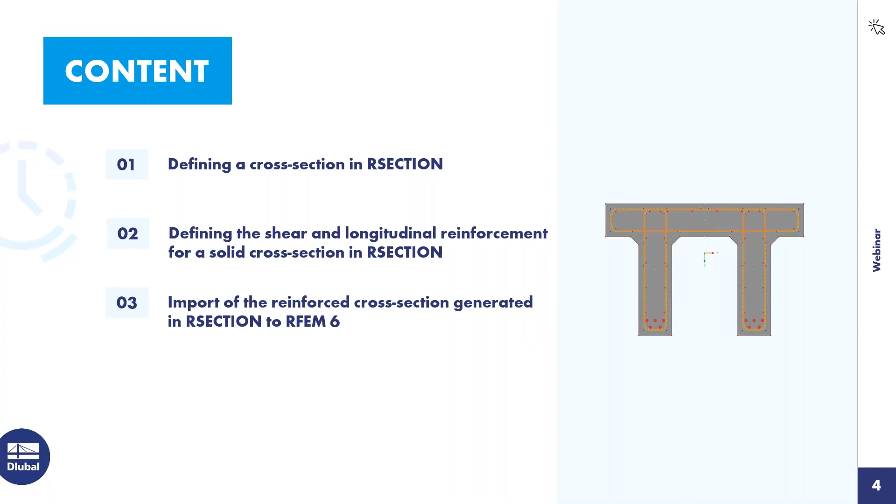Paul will do that. Then he will define the reinforcement in RSECTION, for the cross section that you see on the right side. Then Paul will import the section into RFEM 6, and then he will design the cross section in RFEM 6 with the help of the concrete design add-on.

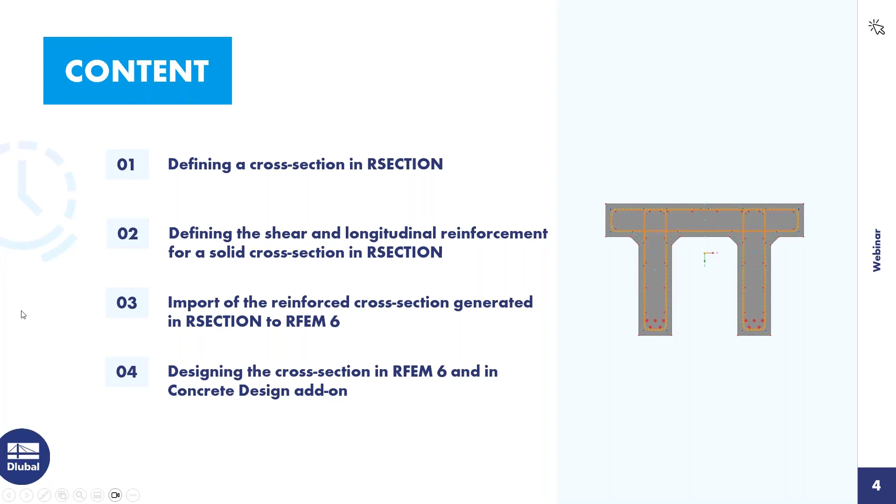Okay, then I hand over the screen to Paul. Paul, it's your turn. Okay, thanks Andreas for the introduction. And I can directly start with our standalone program, RSECTION.

And I will create directly a new model for our section. So I'm entering here a model name. Let's just name it maybe RSECTION and maybe 1, because I will show you multiple ways to define a section in this program.

Because I will show you multiple ways to define a section in this program, what's important now is if you would like to apply reinforcement on your section and do the concrete design, then you have to check on this option here, concrete reinforcement.

And as you see now here, there appeared a new tab, reinforcement settings. Inside this tab, you can define the value for the concrete covering. It is set by default to 30 millimeters. For our example today, I will leave it here with 30 millimeters. I just confirm it.

And then we get this view here. So we have our navigator, we have our tables here, and our graphical window. And now we can just use the options in RSECTION to create any type of massive section.

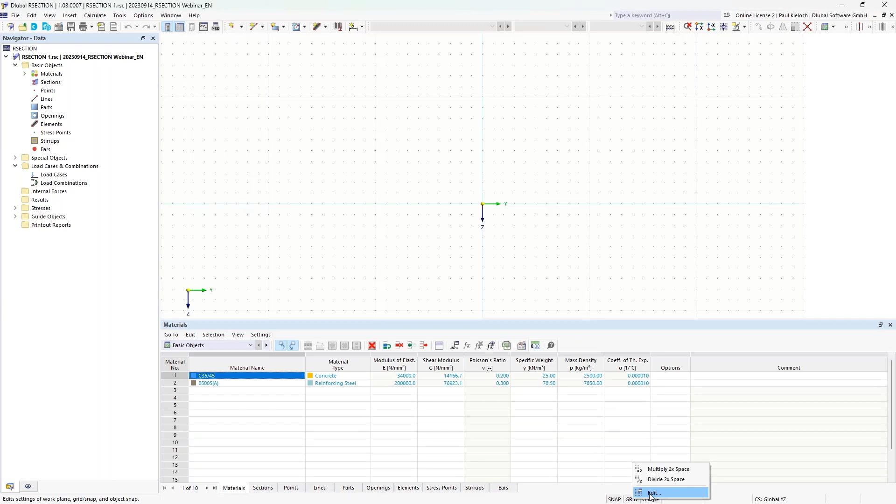So I will start here at first in the first example with creation of a section by using lines. Therefore I will at first create or modify the grid. So I'm opening the settings for the grid and I will change here the grid point distance to 10 centimeters.

So in this way, then I can start with graphical input of the cross section. But before I do that, I can just tell you something about the materials. In this case, the program has loaded 2 materials from my last file, so in this example it fits already perfectly. I need a concrete material for the section and a reinforcement material.

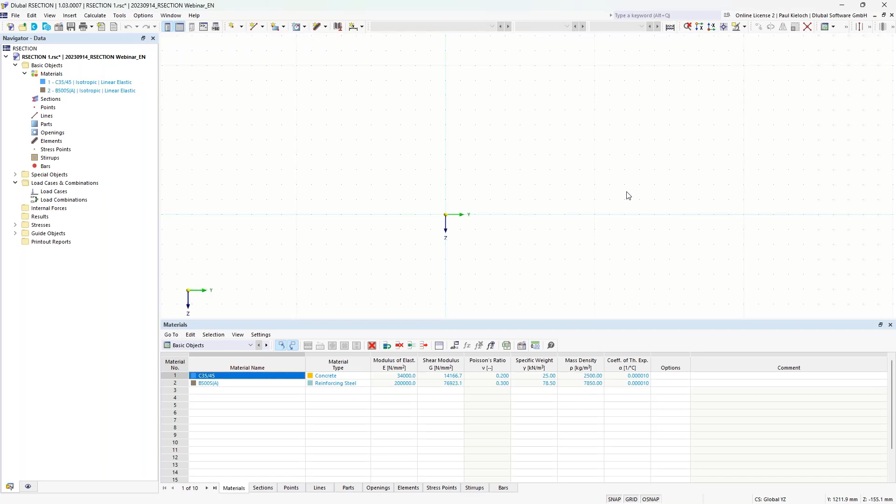If you do not find the proper material, then you can apply material or create a material in the same way you already know from RFEM 6.

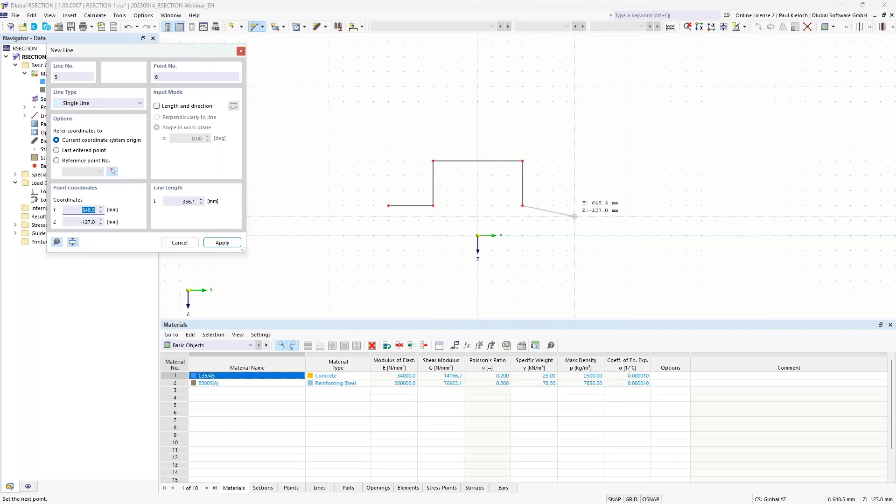As I said, in the first example I will just create here lines, boundary lines for a new section. For example, I can do it in this way: just clicking here into these grid points and create a random section. It could look like this.

And if these boundary lines were defined, then you can create here new parts. Basically, compared to the old program generation, there we had one program: Shape-Thin for thin walled cross sections, and Shape-Massive for massive sections. These 2 programs are now combined in one new program, that is RSECTION.

So you find here both types, the elements for line elements and also the parts if you would like to apply massive or create massive sections. We are dealing today with massive sections, so I will use now these parts to fill these boundary lines with concrete material.

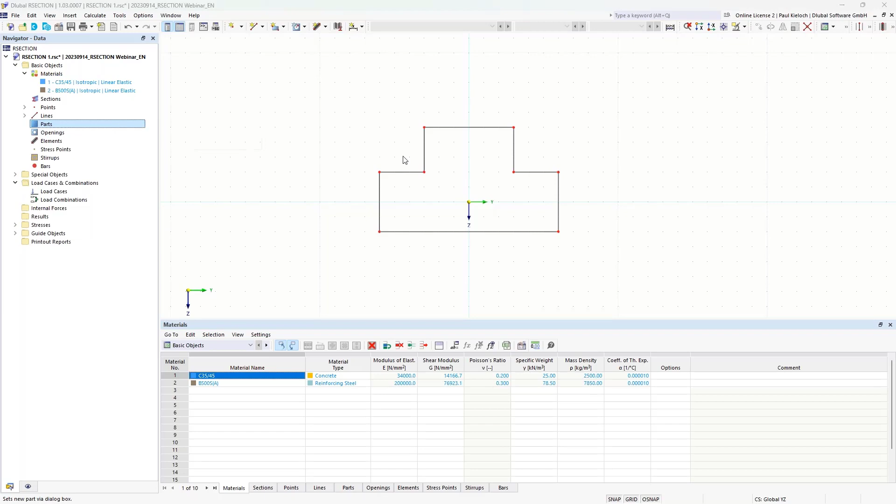Therefore, I can do a right click on this chapter here and select the option boundary lines. The program has already applied here the material number 1, and I can just graphically select these boundary lines, click on OK, and then we see our concrete section, our massive concrete section.

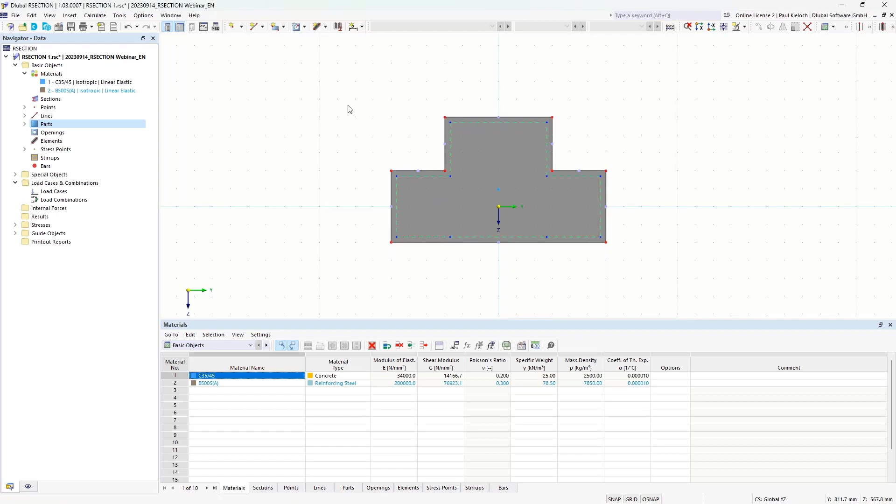And what we already see here too is all these green lines here. That is basically our concrete covering, or the line of the concrete covering. That will be applied in the section as soon as you have activated this option for concrete reinforcement in the base data dialog.

What you also see here are these blue dots. They will be automatically generated by the program. So that is basically an extension of this line, for example, and the program will generate here this blue dot. This blue dot can then be used for the stirrups to define the position of the stirrups. But I will come back to this later on. So at first, I will just show you 3 basic ways how to create sections here.

If you have entered such a section, then you can also modify it. For example, you can go here into these options. In this toolbox, you find here an opening, for example, a rectangle opening. And if you would apply this one, then the program would automatically generate here also this concrete covering line for this opening. That would be the way for the rectangle opening.

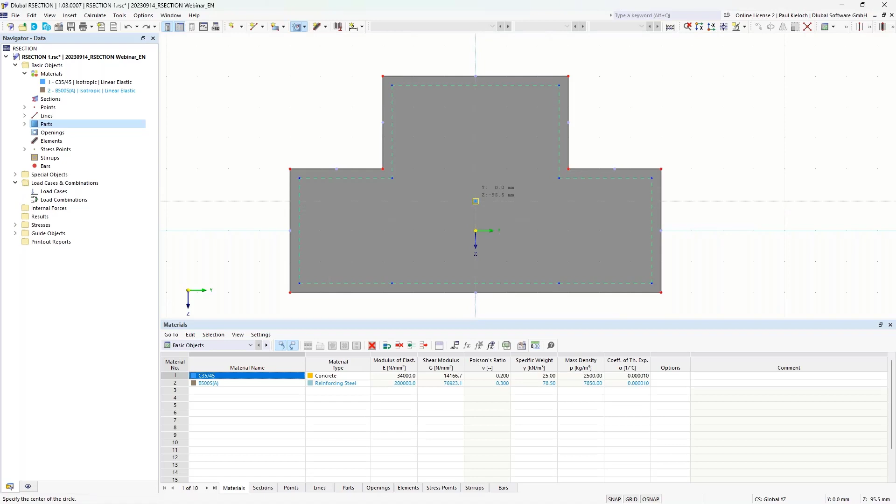If you would, for example, enter round or circular openings in a section, for example, to create a hollow core slab, then you can use this option. If I would apply here a circular opening, then the program would delete the concrete covering. That is caused because the program is in the current state not able to generate the concrete covering for arcs or circular parts. So therefore, we can make a short workaround for it.

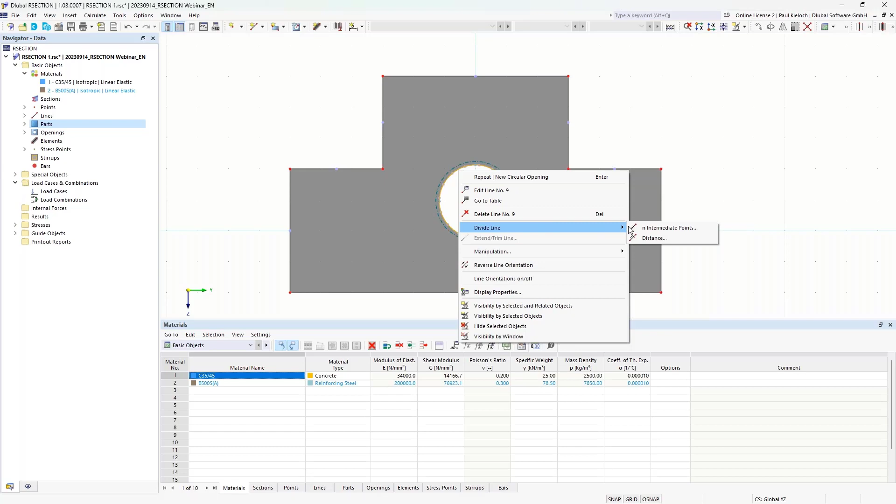So I can divide this line, for example, by intermediate points. Maybe let's do it for 15 nodes, then it would look like this. And then we can switch to the table here with the lines, and you see here for the opening, the program has now applied this line type arc. But if I click here on this cell and use the F8 key on the keyboard, then I can copy the item from the cell above and just apply it on this cell.

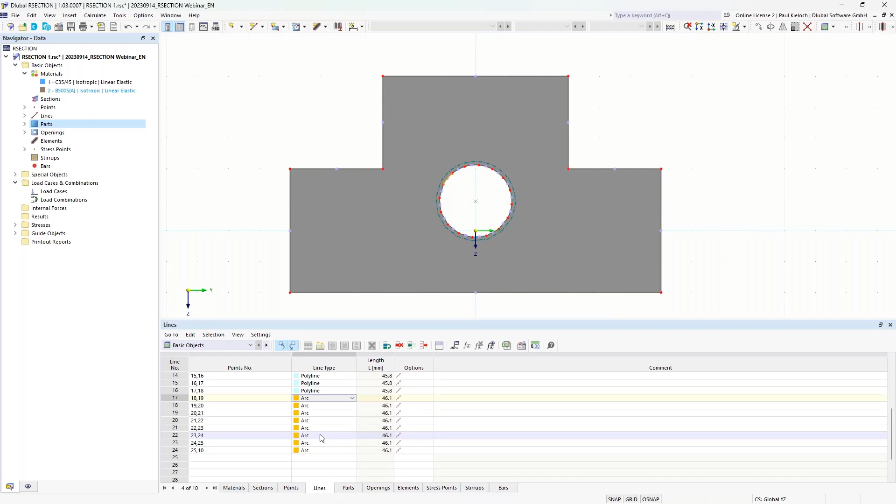So I can click here through this table and change the arcs to polylines. And if I do it for the last line, then the program would be able again to generate this concrete covering line. So that is maybe a small workaround in the current state of RSECTION. If you would like to apply openings inside a massive cross section, then you have to keep in mind that you cannot currently use arcs for it.

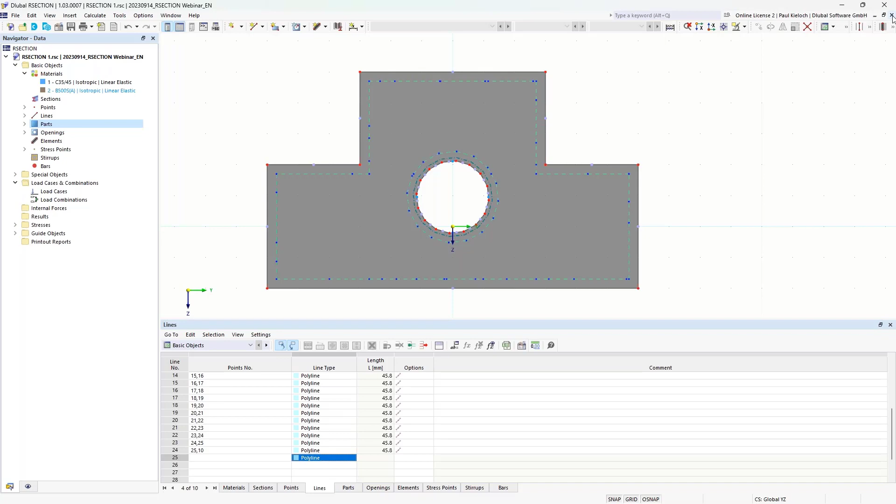Okay, that would be the first option. I will just save this file here, and then I close it and will show you the second option. A second option would be to use the file menu, go to import, and then you have here this option for a DXF file. Then I can select my DXF file here, click on open.

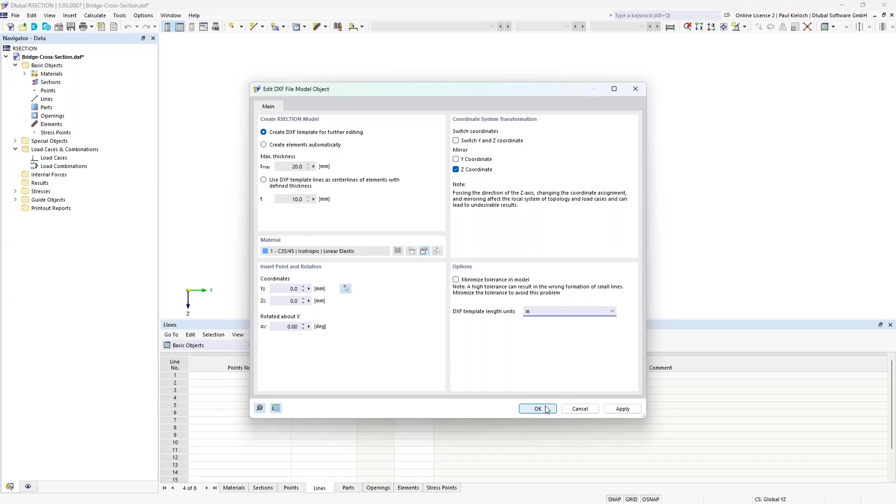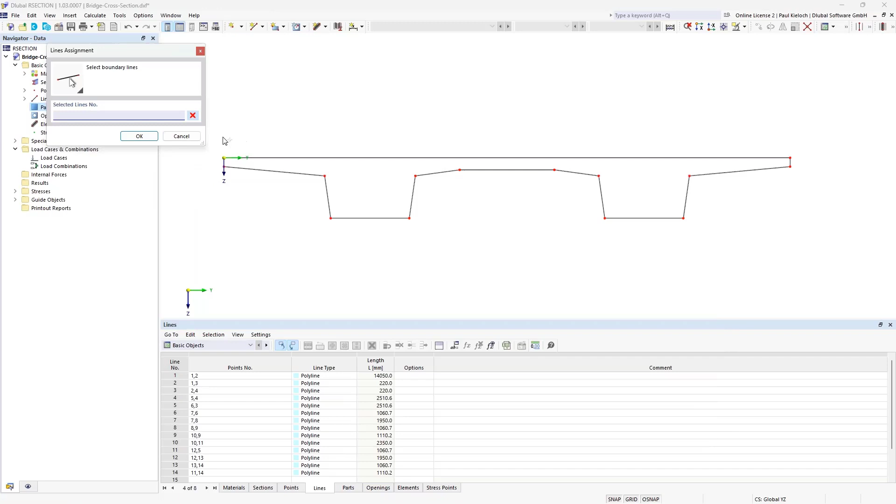And then in this dialog for the DXF file import options, I have to mirror the Z-axis in my example, and I will switch the dimensions to meter. I can confirm that with OK, and then I would get, for example, this shape of a massive bridge cross section. Once again, these are just boundary lines, so there is no stiffness behind the lines. So I can once again go to my parts here, do a right click and say new part by boundary lines, select them and confirm with OK and OK.

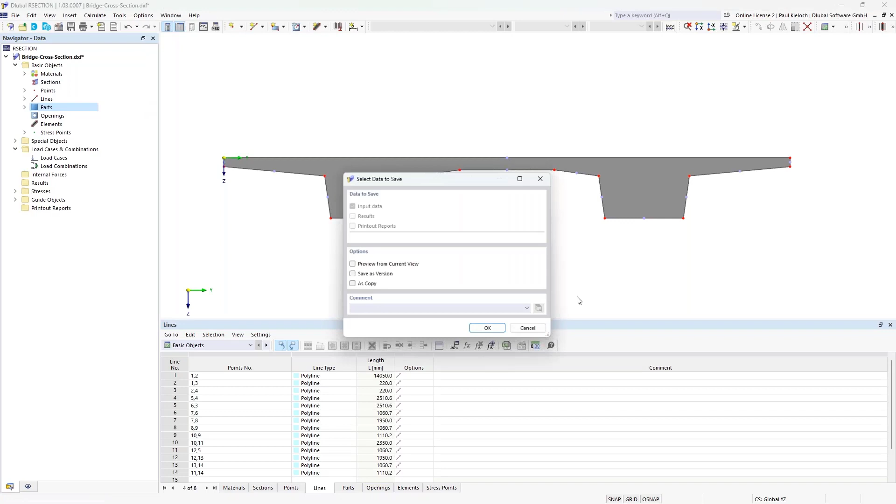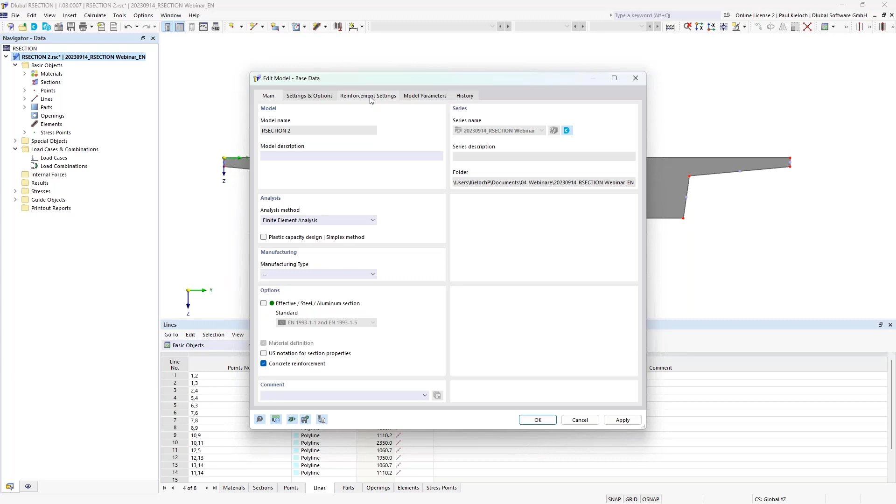What we now see is that our concrete covering lines are missing. That's because we have not activated the option concrete reinforcement in this file. So therefore I will just save the file here as RSECTION 2 in this example. Okay. And if I open the base data dialog for this file once again, then I can activate here this concrete reinforcement option, and for example, change the concrete covering to 55 millimeters, confirm that.

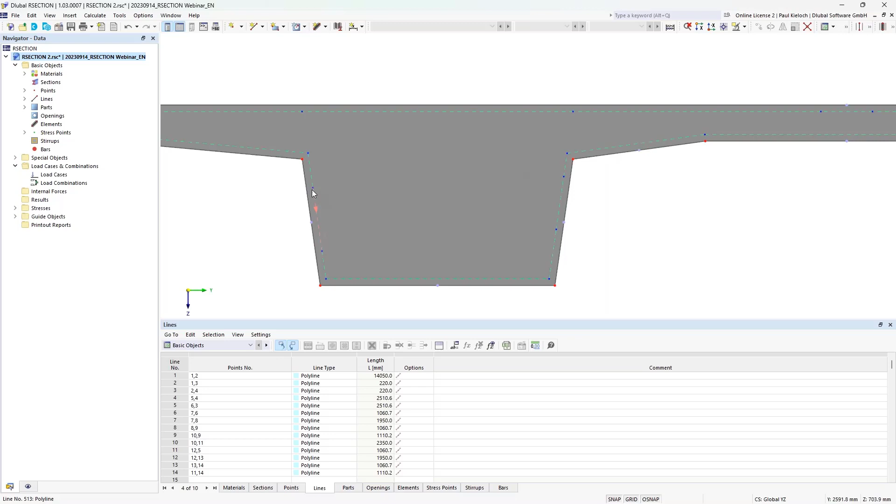And then we will see again our lines with the concrete covering, and again our blue dots here, our nodes that are helpful for generation of these stirrups. So this is always just an extended line here, for example, for this line. If we would extend this, then we would get this node and so on. Okay, that was the second way with import of the DXF file.

I will close this once again and create a new one, section 3, for example. Check on this option once again. I leave the default value here. Now in this example, it is important to check the file for the project folder, because later on I will import this section into RFEM 6, and therefore it is required to make sure in which folder you save this file. So be aware of in which project folder you create this new file. Okay.

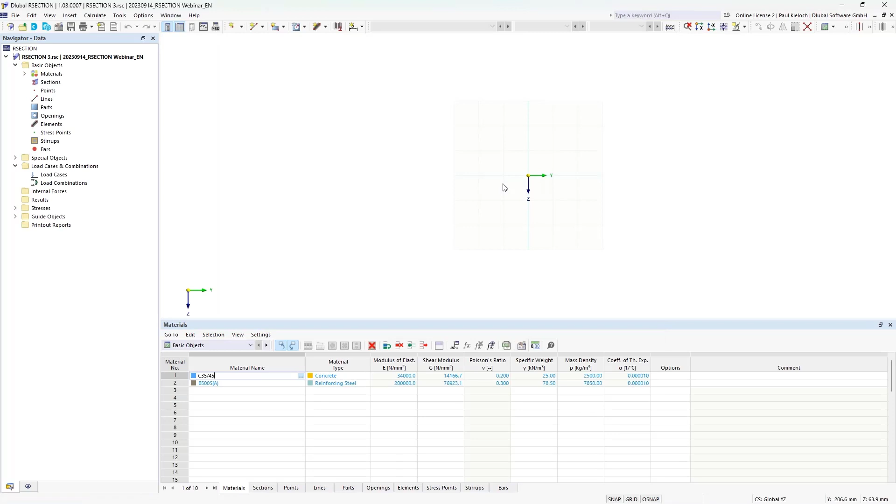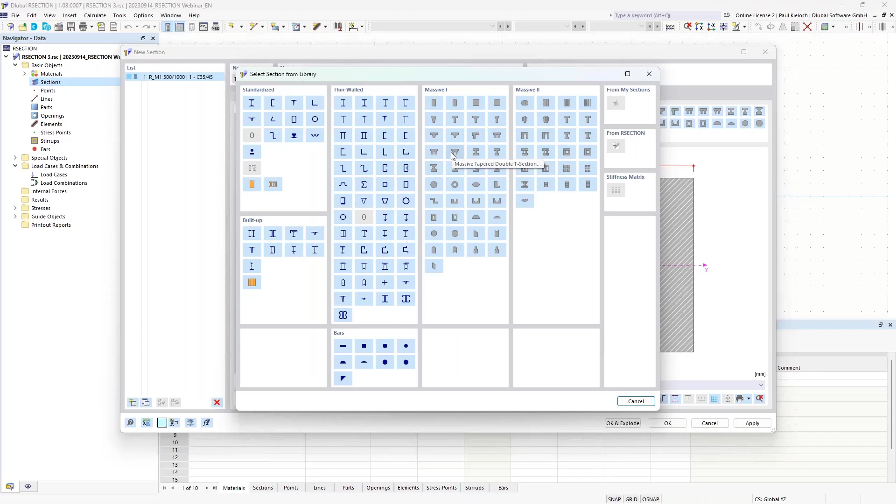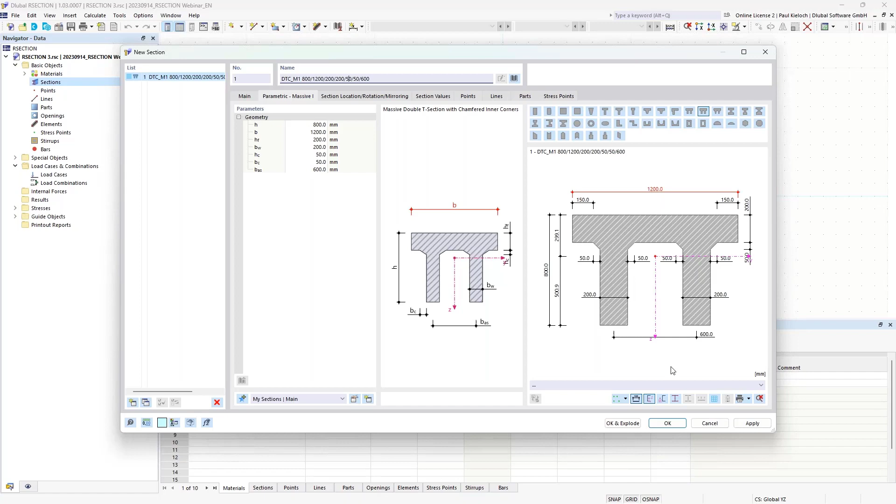And the third way how you can create a new section is by using our cross-section library. That is basically the same as in RFEM 6. You can just click on this button with the cross-section library. Then you have these massive sections. For today's example, I will use this cross section. I will just modify the dimensions a little bit, just by changing the expression or the name of this section, and it will automatically modify the shape of the section. So it looks like this. I can confirm that, and the cross section is created.

Of course, I can now modify the section. I can also assign openings, like I demonstrated in the first example, or modify the edges or the corners of the section and so on. So you are pretty free in the way you create the sections, and that is a benefit compared to the regular cross-section library from RFEM 5. You have the option to import a regular section and then make user-defined modifications on these sections. Okay. Those are the three ways you can import or create a section.

The next topic is to apply reinforcement on these sections. As I said before, by default I already have the concrete material used by the section, and we have our reinforcement material. In the data navigator you can find these two entries, stirrups and bars. Stirrups are our shear reinforcement, and bars are the longitudinal reinforcement. It is common to apply the stirrups first, and once we have applied the stirrups, the program will automatically generate points on which we can assign our longitudinal rebars. So it is common to apply these stirrups first. I will do so in this example too.

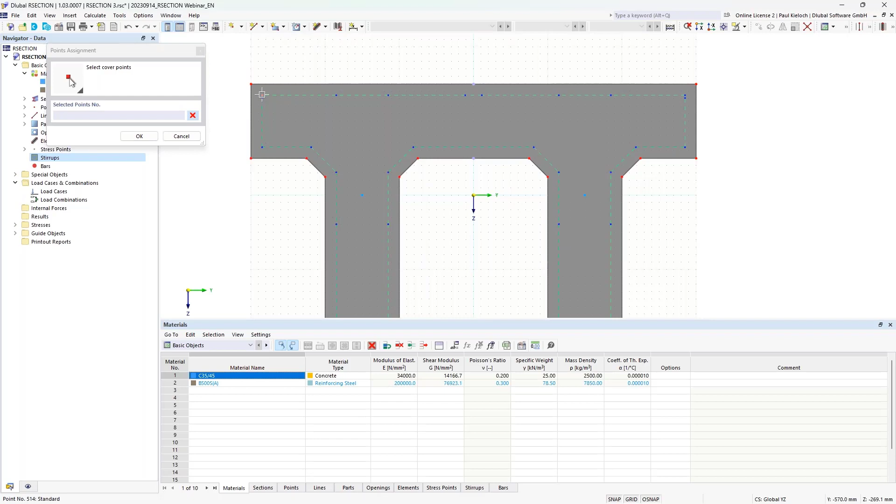So I'm creating a new stirrup. The program has already detected the concrete or reinforcing steel. It was selected here, and I can change the diameter of the stirrup to 10 millimeters in this example. Then we have to check the concrete cover points. For example, I can go to this upper flange and just select the nodes on the corners of my stirrup. Now I have to take care of the nodes. I have to close the stirrup or shear link by clicking a second time on this first node, 514, so that the program knows, with the first and last nodes having the same number, that the stirrup is closed. And then it looks like this if I confirm it, and that would be our first stirrup.

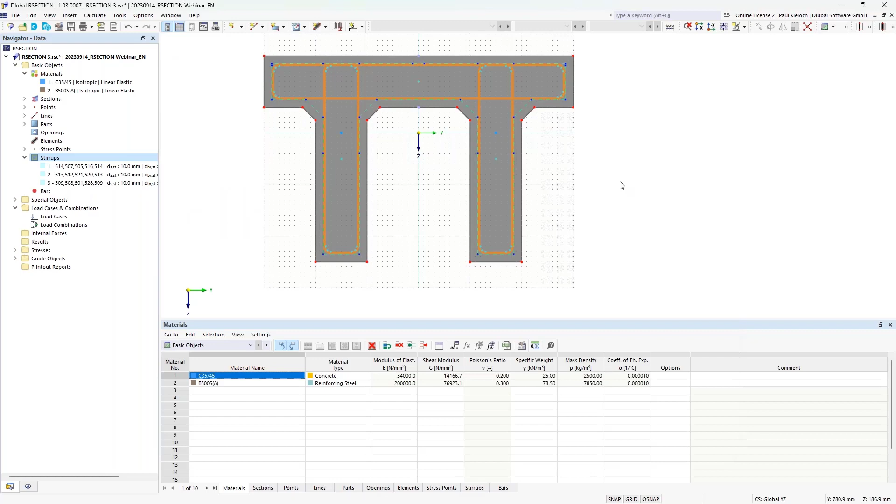I can do the same for the web. So this point, this point, this point, and this point. And keep in mind, close the stirrup by clicking on the first node once again. And then the stirrup is closed. And the last time on this side, oh, I missed it. So here, this one, this one, this one, and 509 once again. And then it looks like this. Okay, I will save this.

The next topic is to enter the longitudinal reinforcement, and therefore we use this option, bars. If I do a right click on bars, I can apply new bars to define reinforcement. First, you find the definition type. By default, it is set to multi and uniform, so the rebar layout looks like this. Then we also have variable, where we can differ the individual spacing, so the distance between the individual bars. And then we also have options to define single bars. I will use this option first, so I will apply a single rebar on a certain point.

Therefore, the program asks me to enter a layer on which I will apply these rebars. In general, you could apply all rebars on one layer, so it would not be a big issue if you did not take care about this layer system here. But later on, if we switch to RFEM 6, you have the possibility to modify the length of the individual rebars on the member. So we will need the layer system later, and I will show it afterwards once I have imported this section into RFEM.

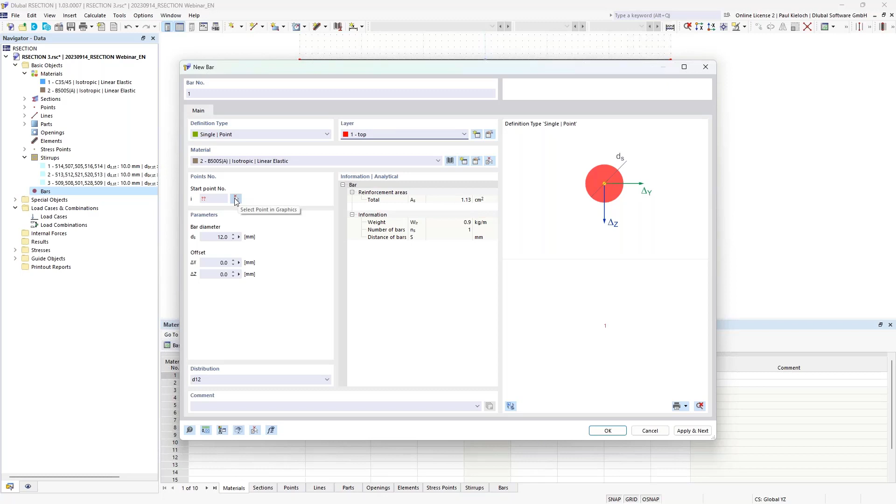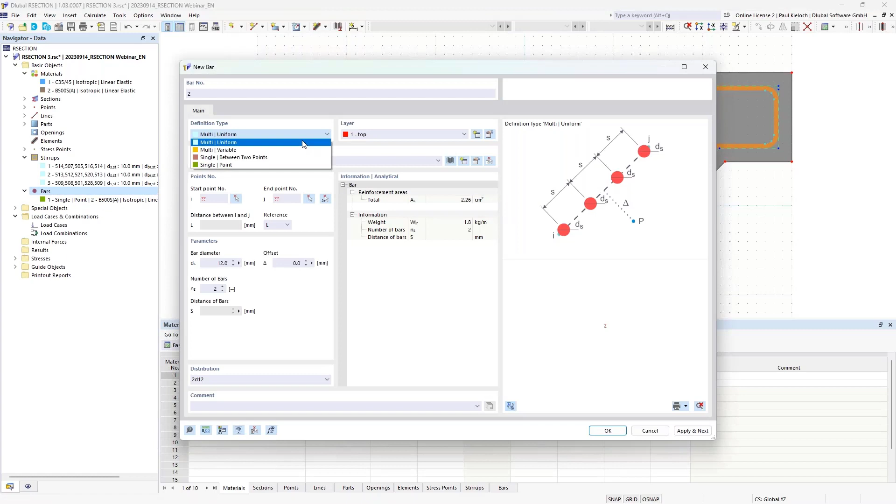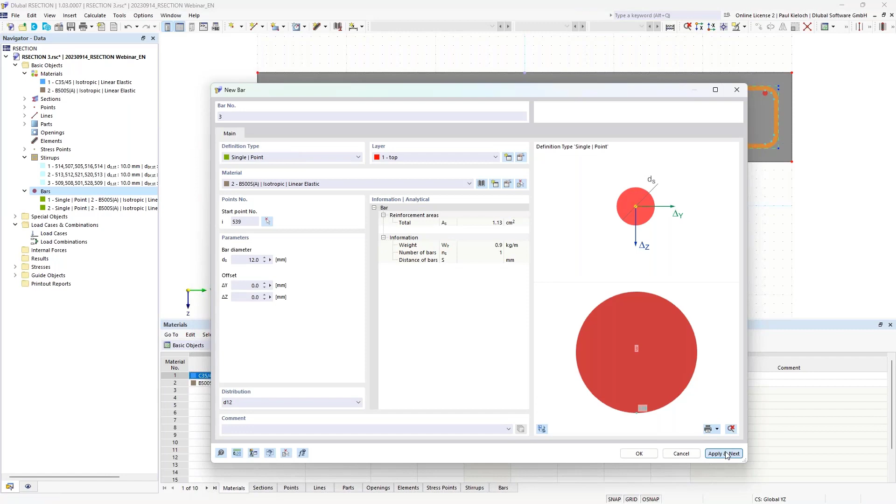Now I can just click on this button and define the position of the rebar, for example by clicking on this node here. Click on OK, and the rebar is assigned at this point. Another option: click once again on single, select this node, and stay in this dialog by clicking apply and next. Then I can use the next position, apply next, maybe this position, and OK. That is how you can define individual single rebars inside your cross section.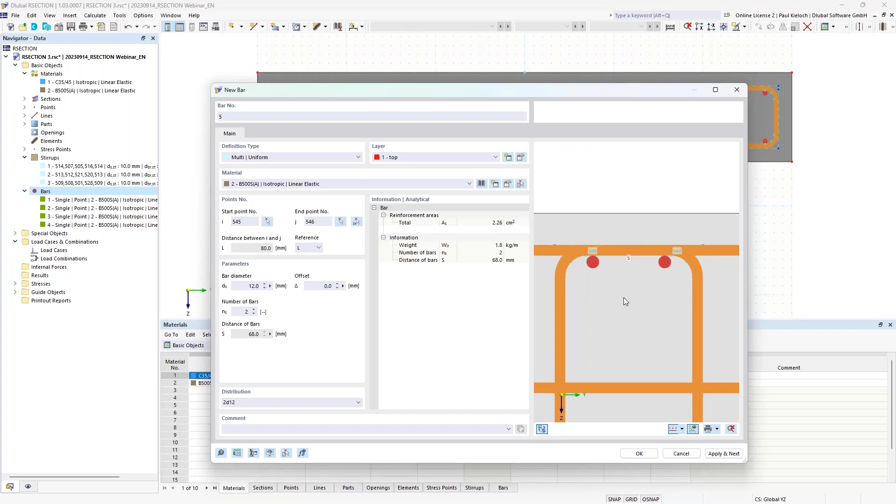The next option is the uniform layout. I will also apply it first in the top layer. Select, for example, these two nodes. The program shows me the distance of the two rebars, and if I want to check it graphically before assigning it, I can click this button and the program shows how it would look. I can also modify it, for example with 3 rebars, and if it's okay, click OK to confirm. And then we have this.

The next option for entering rebars is to click on this line in the table, right click and copy this row. Then I have copied these rebars, so they have the same position, and I can change the starting point of rebar number 6 in the table from here to that node, and then it looks like this. So you can also use the tables to modify the layout of your reinforcement inside the cross section.

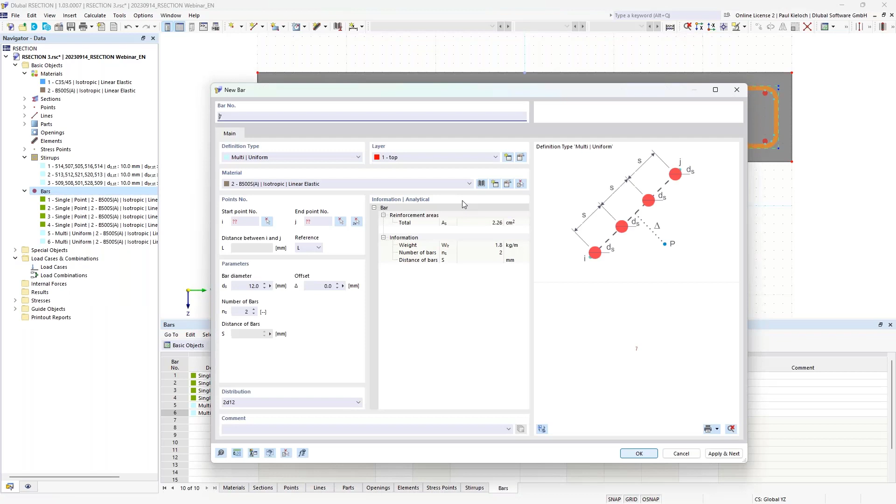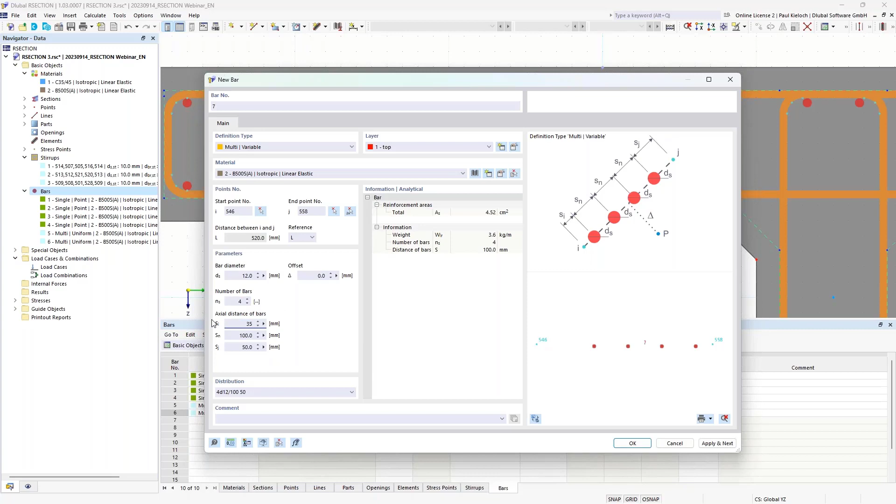The next option is multi and variable. There you also define a start and end point, in this example here and this one. But I don't want to apply the rebar directly in this position; I'd like it here, so I can use the options for the axial distance of the bars from the start and end point. I would like 4 rebars with a diameter of 12 millimeters, first spacing 35 millimeters, then 150 millimeters. I can double check it with this button. It's okay, so I confirm, and then it looks like this.

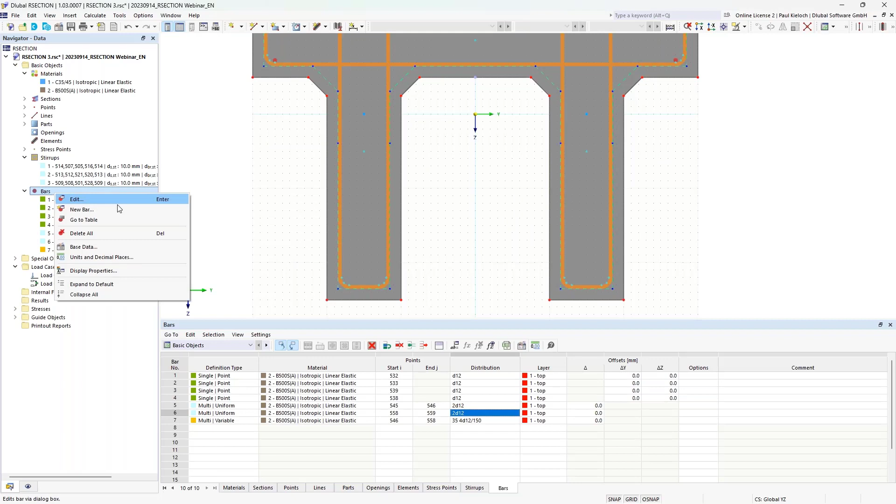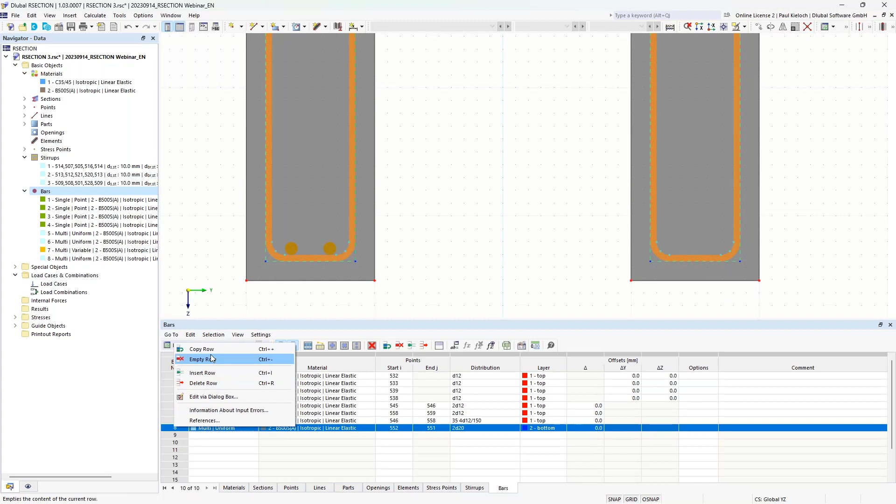So that is my top reinforcement for this example, and I will switch now to the bottom reinforcement. It's basically the same as before; I just have to take care about the layers. This time I will apply it here with a diameter of 20 millimeters and confirm. Then I click this line in the table, right click, copy row, and modify the start and end point. So it's simple to copy this reinforcement from one web to another.

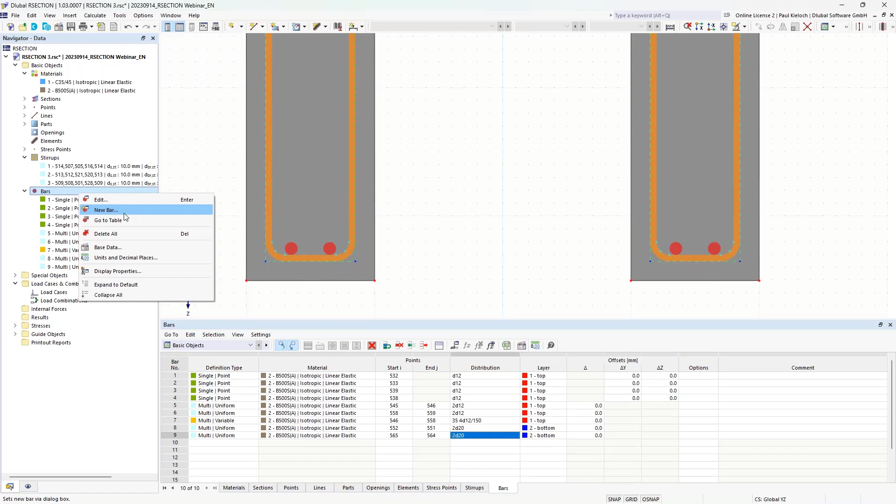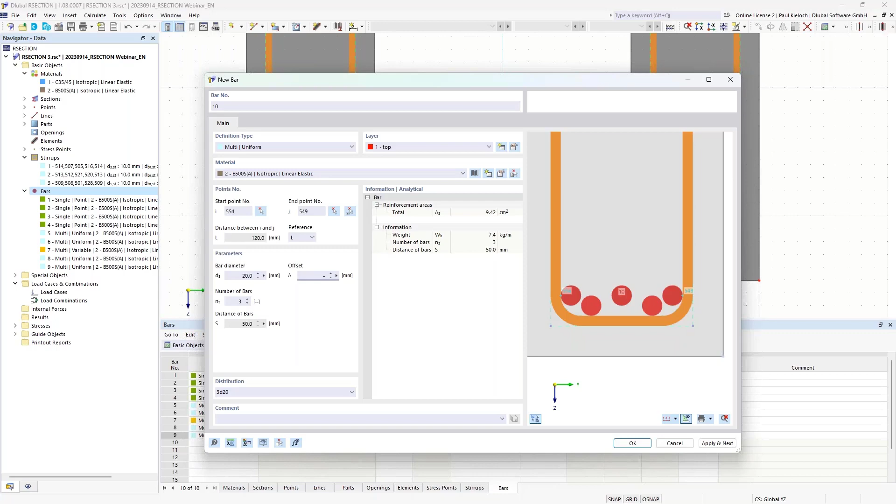The next option I would like to show is working with offsets. I'm creating a new rebar once again, using this start point and this one, and switch to 3 rebars. If I check it in the graphic, I see that the spacing between layer number 1 and layer number 2 is maybe too close. To change this, I can use the offset. In my example I use 30 millimeters for the offset, and then it looks like this.

Click on OK. And then these 3 rebars are assigned here. Once again, I can click here on copy row and just select these nodes. And then it looks like this.

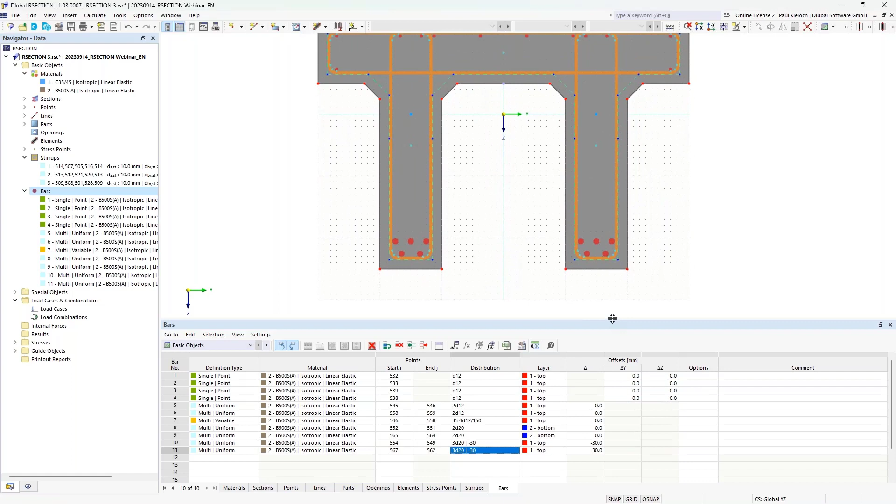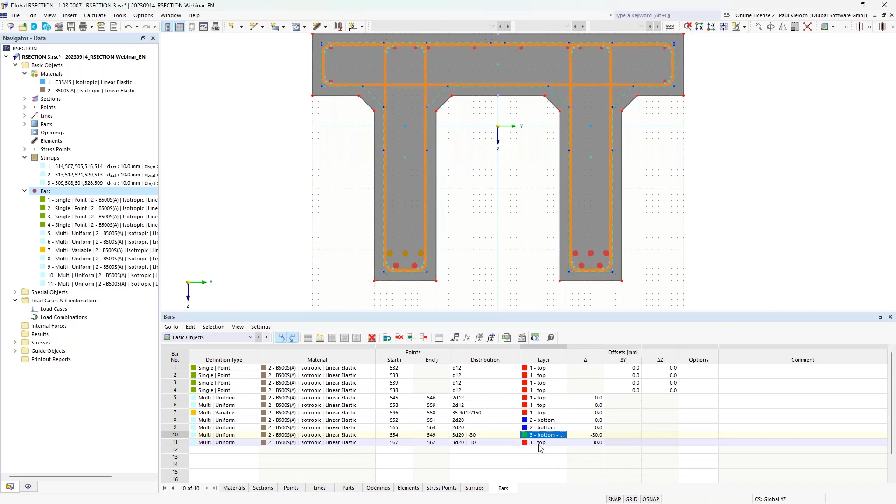Now I missed here the setting for the layer system or for my entered layers, and this can be also checked afterwards. So you see here that I have applied the rebars number 10 and 11 into the wrong layer, so I can click here in this cell and put them into the additional reinforcement. Looks like this. Okay, and the last would be here the reinforcement on the sides.

Therefore, I'm clicking here once again on new rebar, changing it this time to multi and variable. Select the start and end point. Start point should be here, end point should be here. The diameter should be 10 millimeter in this example. Offset is 0 now. I would like to apply 5 rebars.

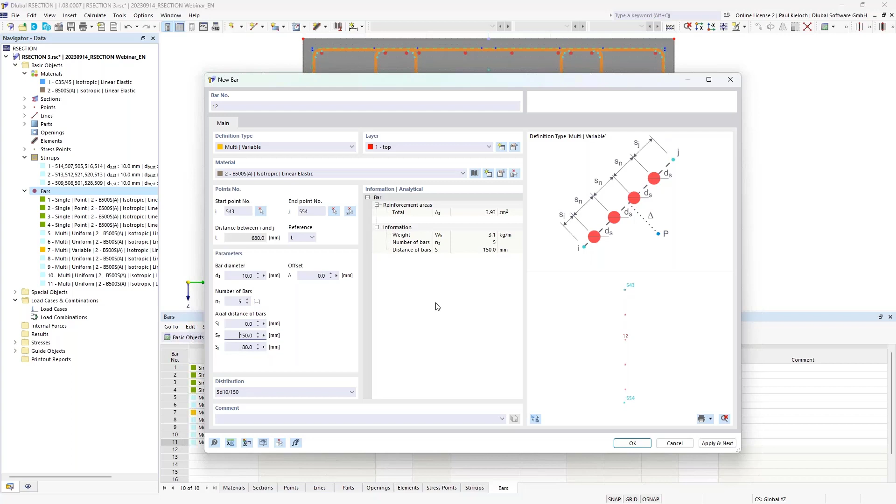The distance from the start should be 0. The spacing is 15 centimeters, and the distance at the end and the last point is 8 centimeters. If I click here on this button, then you would see how this reinforcement would look like here in this example. Can click on confirm, and then it looks like this.

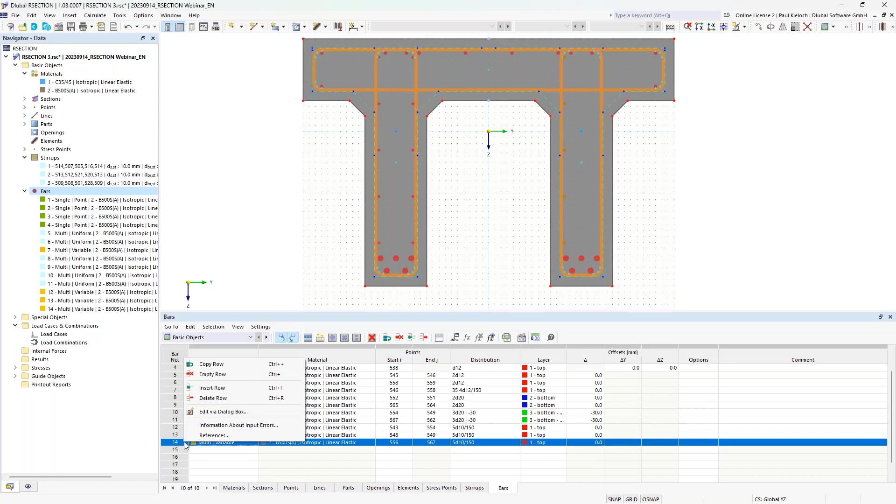And here I can do the same. Copy the row, just modify the start and end point. Copy. Start and end. And the last one, copy,

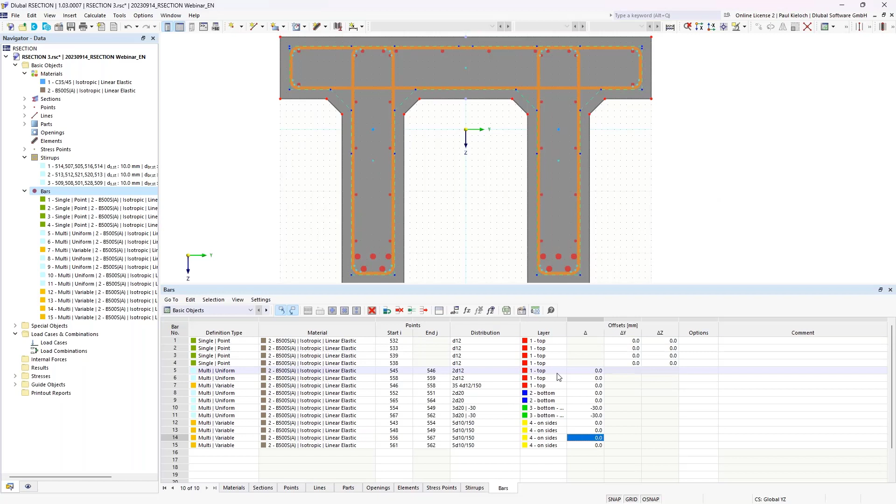start and end. And as before, I forgot to switch here the layer, so I will do it here in the table. That is our reinforcement on the sides. Okay, it looks good. So if you have entered all your rebars, then before you import this section into RFEM, it would be always good to check here this layer system.

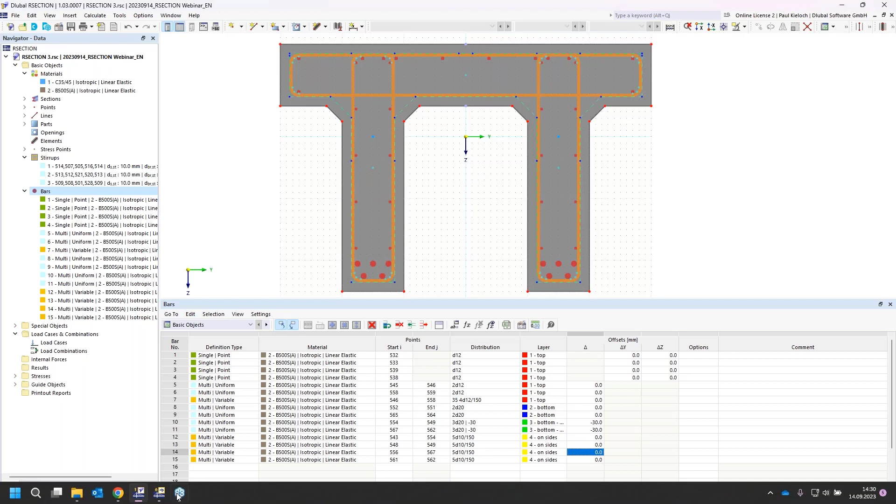Okay, I save it. So this file is now named RSECTION3, and I will import this cross section now into RFEM6 to do the concrete design checks in RFEM6. RFEM6 is already opened here on my PC. I will just create a new file, a new model.

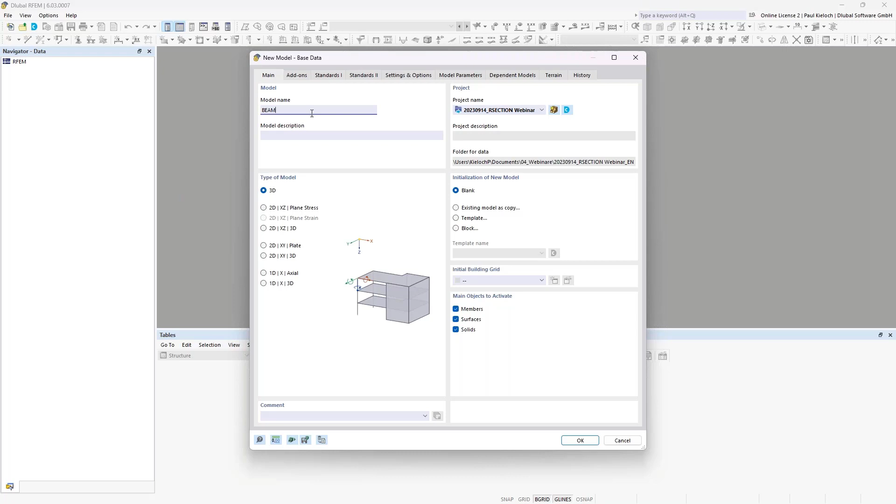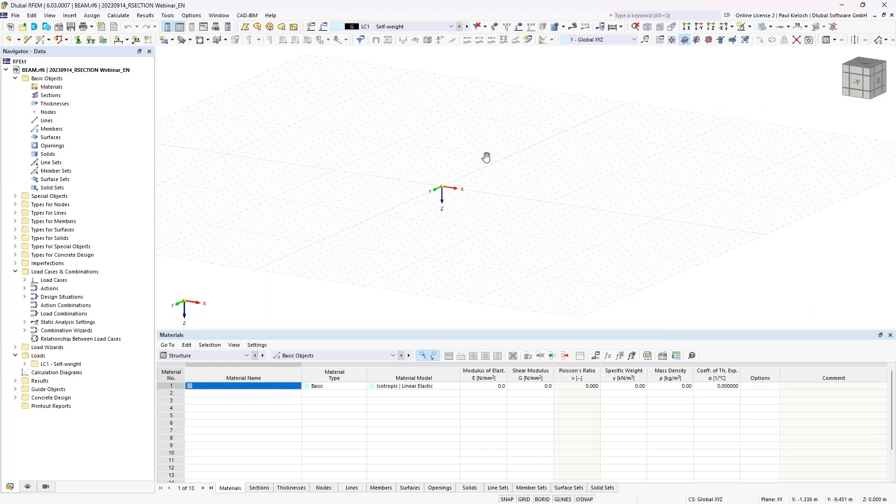Now it's, as I said before, important to check in which project you will create this new RFEM6 file. I will just say it's Beam. Then I'm switching to the add-ons. For sure, I will have to check on the concrete design add-on for this example. And in general, it doesn't really matter which annex I will use here for this example, but I will choose the German one here. That's okay so far. Confirm is okay. And then we have an empty file.

Normally, if you would create a new section, then you would at first create your materials. But in this example, if we create or import a new RSECTION, then we do not need to create new materials, because these materials will be automatically imported also by the RSECTION file.

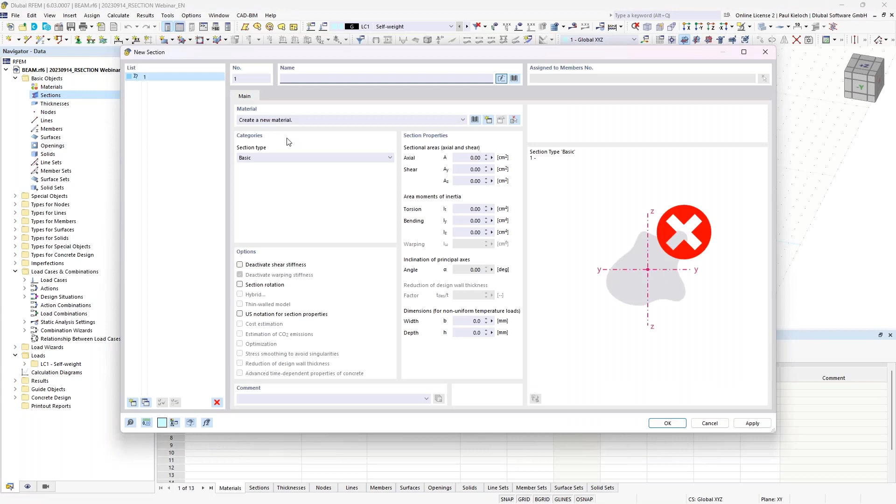So I can directly do a right click here on the sections, go to new section, to our library, and then I find here this button from RSECTION, and if I click on this button, then you see here the small window, and now the program is searching for all my connected projects, and there I can go to RSECTION3. That was the cross section which we have created now. I can click on OK. And you see our section here inside RFEM6.

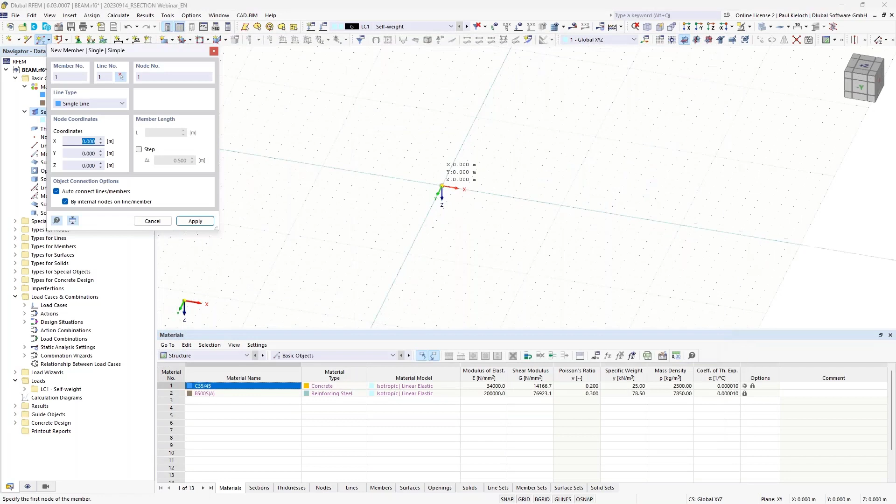I can confirm that. And if we open here the entries for the materials, then you see our concrete material that was used in our section, and also the reinforcement material that was used. And it is here not in black or in blue, it is in purple to show you that it is a generated item. Okay, that is our section, and we can directly create a new beam by using this section. And in this example, just a very simple beam like this.

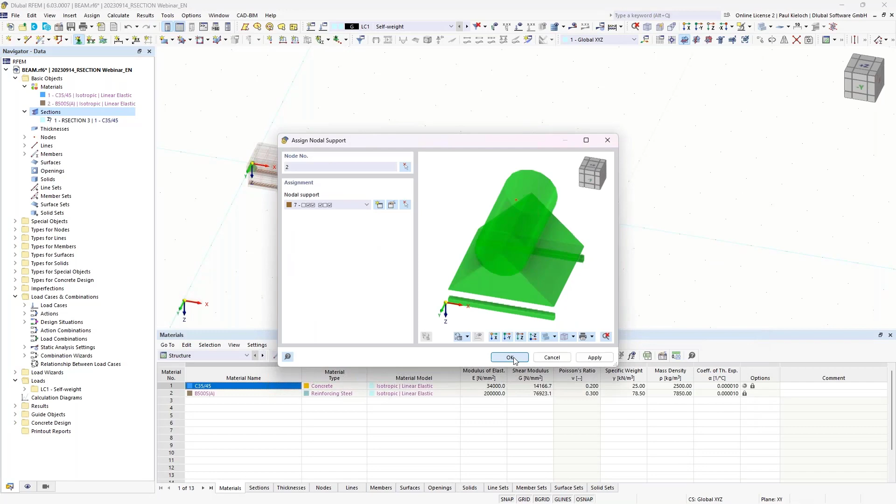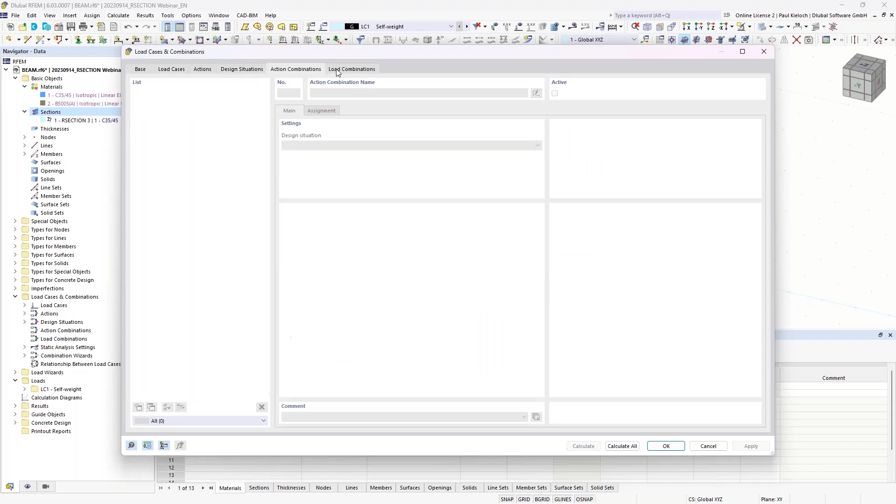Then I will apply here a support. Okay, and at the end, in this way. Okay, so the beam was entered, also the supports, and now I just have to take care about the loading and the combinations. Therefore, I will create a new load case with live load and change the action category here. So the program will automatically generate our load combinations.

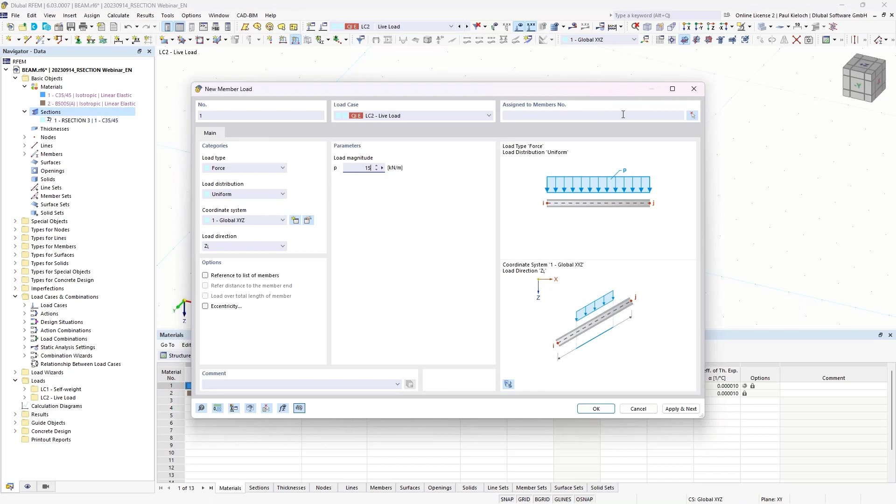Confirm that, and now I apply here a self-weight of 3 kilonewtons per meter on member 1. Click on Apply Next. Then I switch here to Live Load and change to 15, and it should be also applied on member number 1. Confirm is OK. And then we have entered our loading, and I can switch to the combination 2, for example, and our loading would look like this here for the ultimate limit state, or for example for the serviceability, like this.

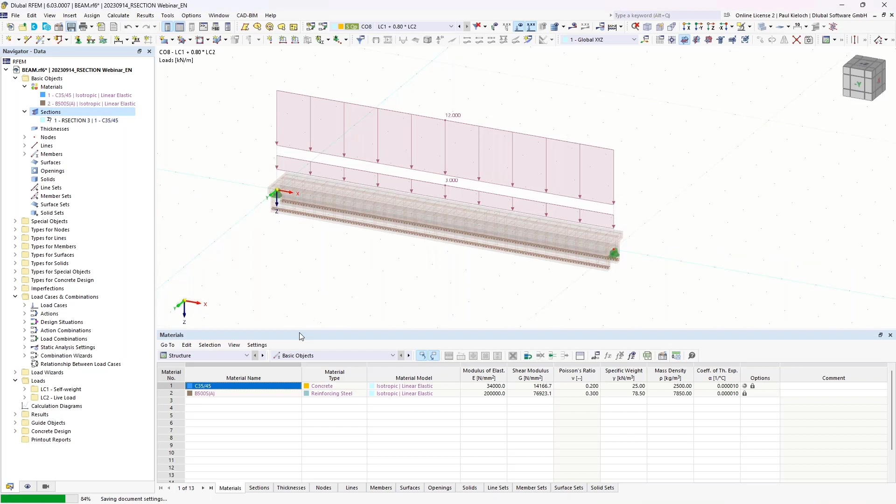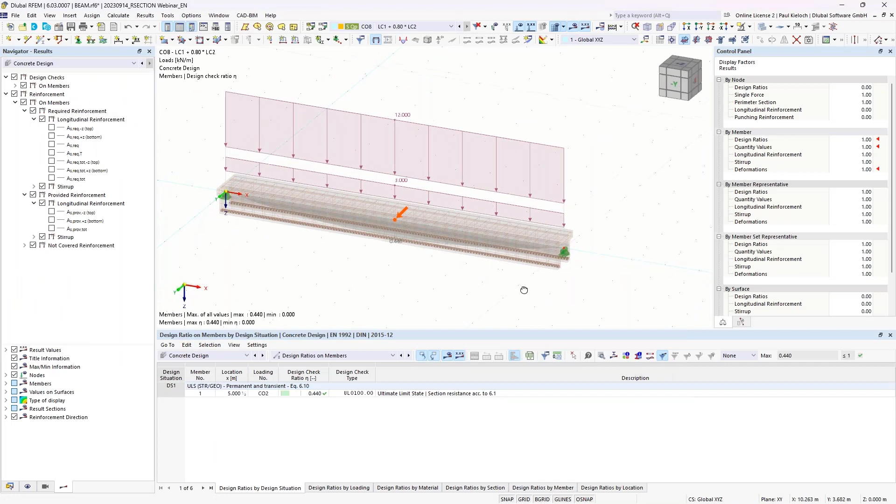Okay, I can save this, and basically I can directly start the calculation in the add-on. So the program will calculate the internal forces, and then start the design checks in the concrete design add-on. And it directly works out here in this way.

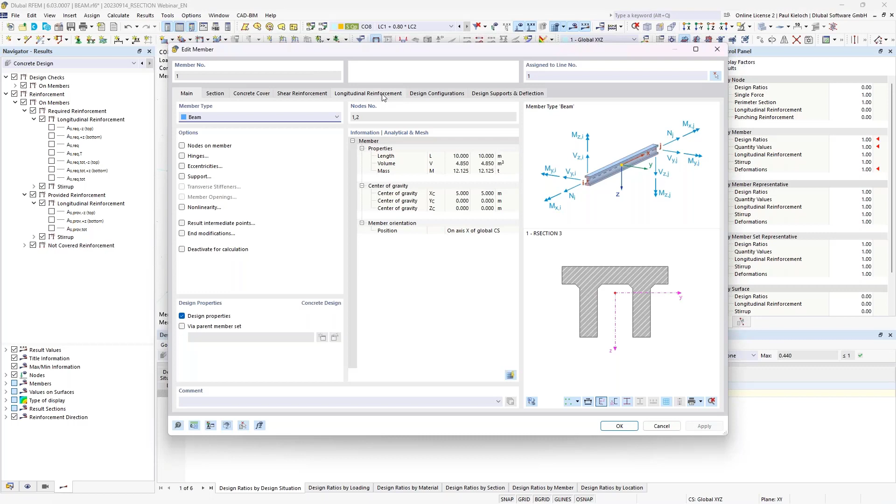Now we can do some modifications also on the reinforcement. So if I would like to change something on the layout of the rebars inside the member, then I can open the member and switch through all these tabs here.

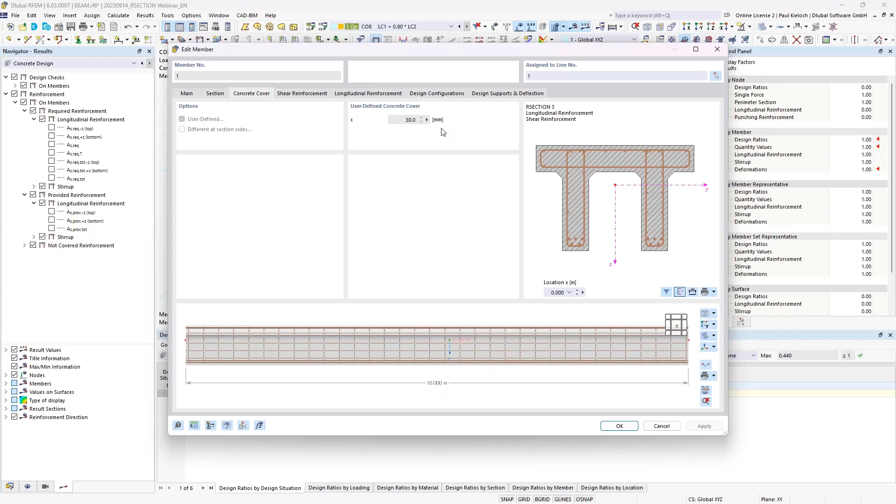For the concrete covering, for the regular sections, you would be able to define here these exposure classes. For the imported RSECTION cross sections, it is not possible. There, the concrete covering was defined in RSECTION, and you have just this cell here with the information which concrete covering will be applied for the design checks. If you would like to change it, then you have to switch back to RSECTION, change it in RSECTION and import the cross section once again.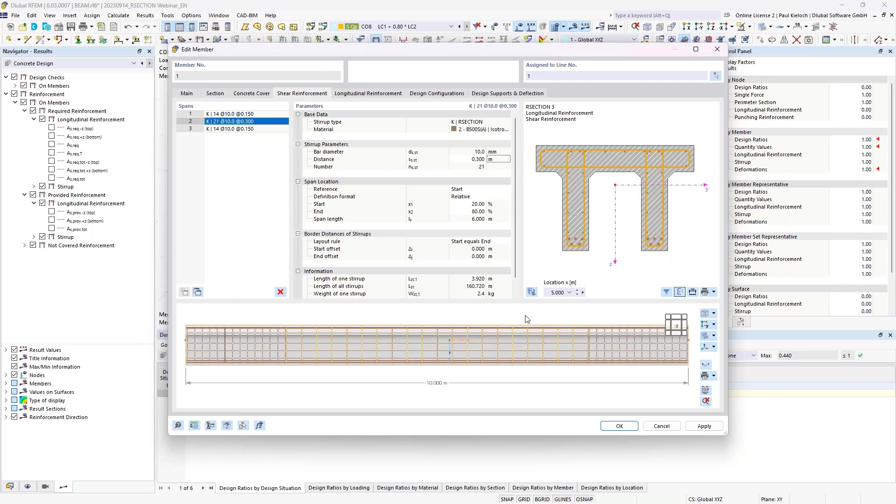For the shear reinforcement, the program has created one span, and by default the program would apply this layout from RSECTION with a spacing of 30 centimeters. Of course, you can modify the spacing here, and you can also click here and copy these spans. So for example, you will get 3 spans, then you could switch the length of the individual spans and maybe say the middle span should start at 20% of the member length and go to 80% of the member length. And then you could switch the spacing for the middle span, and then it would look like this, for example.

So the shape of the stirrups or shear reinforcement was defined in RSECTION, and the spacing can be afterwards modified in RFEM itself. So RSECTION is just used for design or entering of the shape of the individual stirrups.

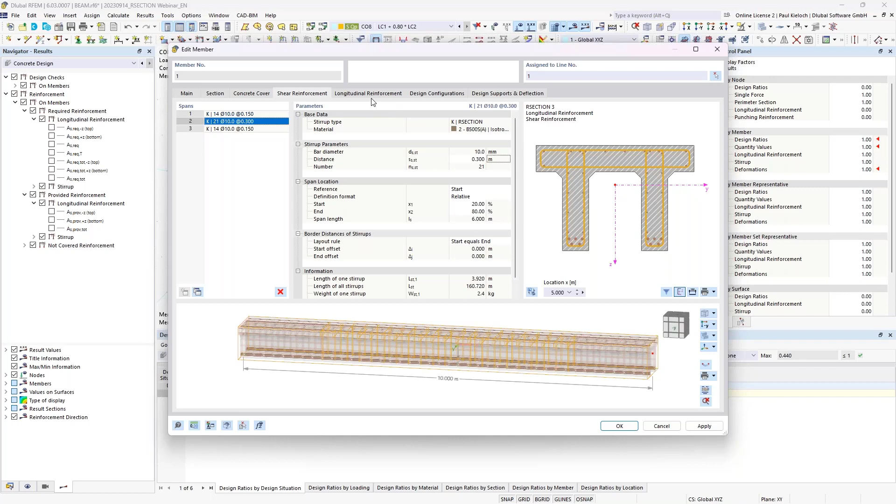Next topic would be the longitudinal reinforcement, and there you see these items 1, 2, 3, 4, and these items are generated by our layer system in our RSECTION file. Like I said before, I have entered 4 layers in RSECTION, and the program now creates 4 items. So for every layer from RSECTION, you will get 1 item in RFEM.

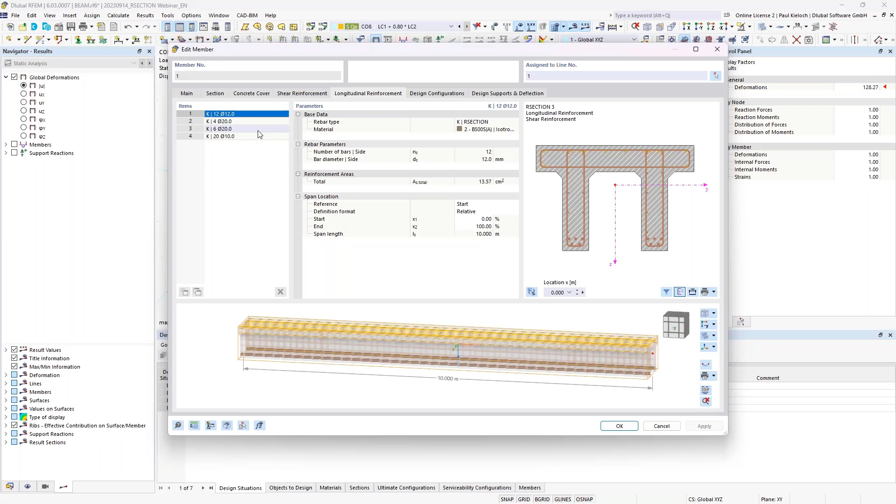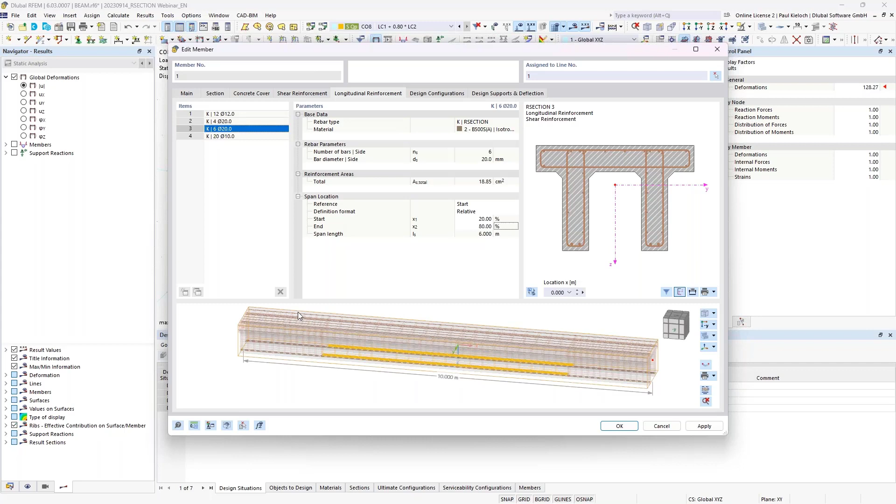And now I can click on my 3rd item. That was my additional reinforcement on the bottom side, and then I can change the length of this additional reinforcement, and it should, for example, go from 20% to 80%, and then it would look like this. So once again, where the reinforcement is exactly located inside the cross section is defined in RSECTION, and after you have imported the RSECTION layout into RFEM, you can modify the length of the individual items here. Okay, that's basically all we can modify in this dialog.

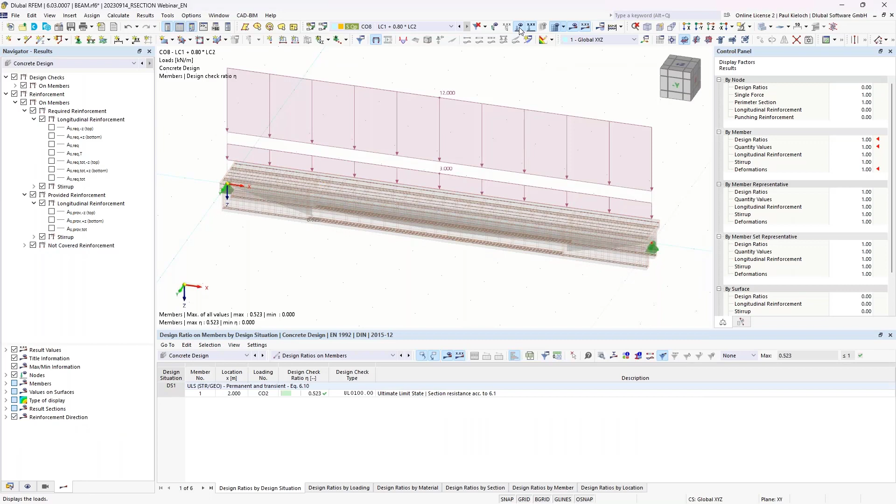I can confirm, then it looks like this. And I can click once again on calculation, and the program will just do the calculation once again in the add-on. Then I will switch off the loading and also the rendering of the reinforcement and switch to the wireframe display model, and we can check the results.

Okay, so what you currently get if you do a design check with RSECTION is the design check in concrete design UL0100. So it's basically a general design check for sectional resistance, basically for normal force, bending, etc. Currently, the design checks for shear force and serviceability limit state design checks are not supported. We are working on a solution for it, but currently you have basically the same state as in the old program generation with SHAPE-MASSIVE. But we are working on a solution so that in future we will also have the option to do shear force design checks and serviceability limit state design checks.

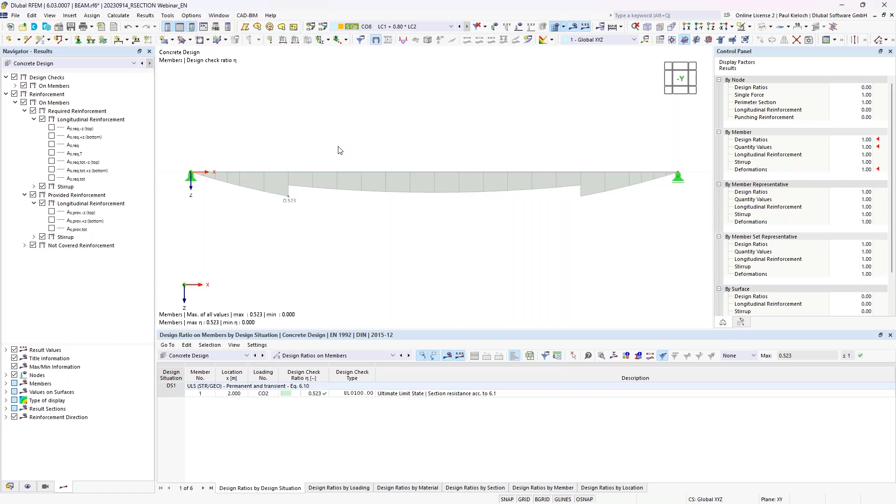So that is my design check for the member, but I can also switch, for example, to the required reinforcement on the bottom side and compare it with the provided reinforcement on the bottom side. And then it looks like this, and I can increase the display factor a little bit. Then it looks like this. And we see that our provided reinforcement is covering our required longitudinal reinforcement on the bottom side, just as a very simple example here on this section.

If you would like to see further details from the design checks, then you can click on this cell here in the table and open the design check details.

Basically, it's the same as for regular cross sections in RFEM 6. You can also click here on the diagram in section and check the concrete stresses and steel stresses, etc.

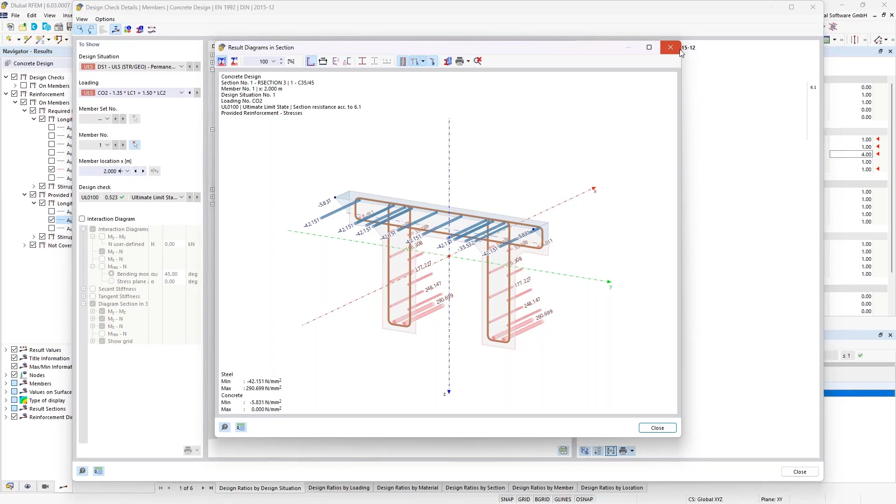In this example, it was for the X location at 2 meters, on the side where we do not have additional reinforcement. If I would like to show it for the additional reinforcement, I can switch to the other side and open it once again, and then you see the stresses in the additional reinforcement, for example.

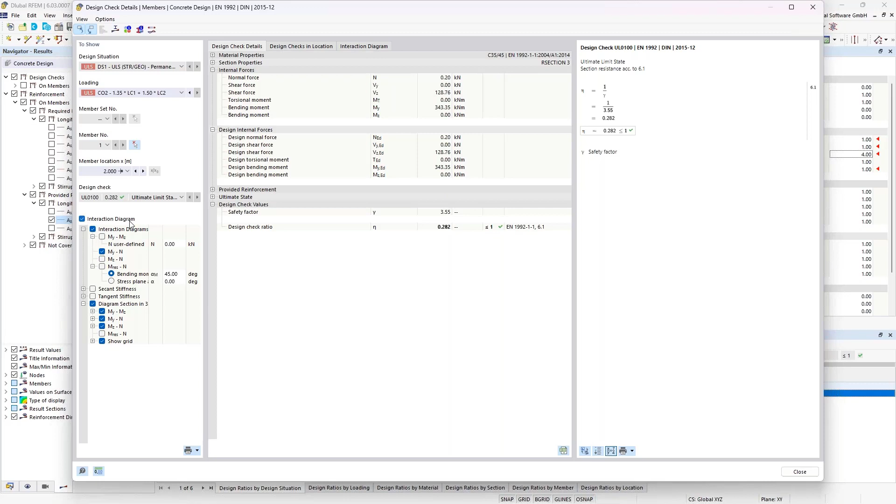And what's also possible is to activate the interaction diagram. You can click here on this option. If you have activated this interaction diagram, then you get this additional tab, interaction diagram. It looks like this for this example.

Then you can switch here which interaction diagram you want to check or see. My example is pretty simple, so it makes no sense to make big changes because I just have the loading in my example. But you see here the shape of the interaction diagram, for example, for My and N.

In this example, I can switch from the X location without additional reinforcement to X location 2 on the right side with additional reinforcement. You see it here - this one and this one. There you see how the shape of the interaction diagram is changing. That is caused by the change of the provided reinforcement.

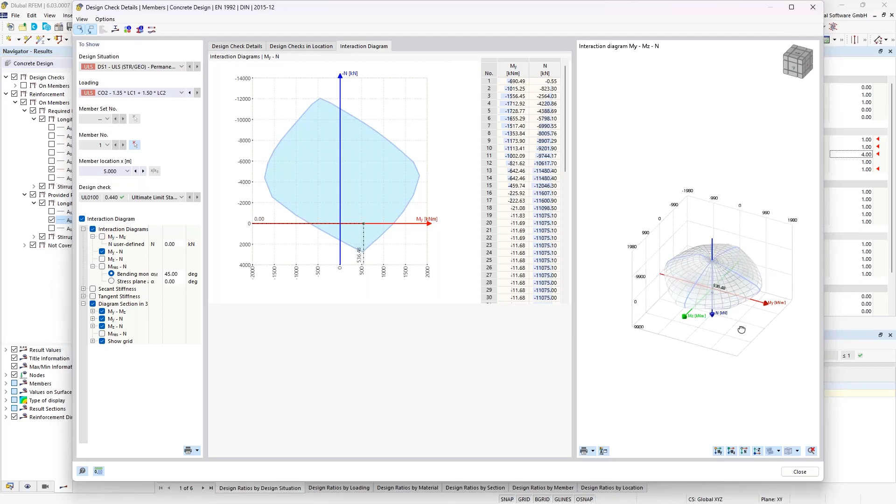And if you go further into the middle of the beam by clicking these buttons, you see our acting moment. If we go to the middle of the beam, it would be at 5 meters, and we have our moment shown in this interaction diagram. You can also check it here graphically.

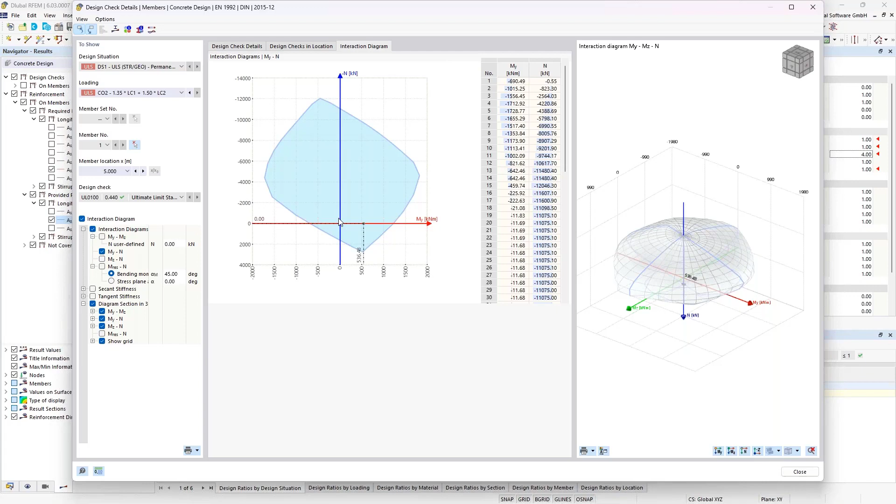So that is also a feature which you have for the regular sections in RFEM 6, but it's also available for the user-defined massive cross sections from RSECTION. That is basically what's currently possible in RSECTION in combination with RFEM 6.

Like I said before, we are still in development, so that is the state, let's say, summer 2023 or early fall 2023. As I said before, we are working also on solutions for the serviceability limit state and shear force design checks, and then you have also benefits compared to the old solution in SHAPE-MASSIVE. That's basically all from my side now, and I would hand over the screen back to Andreas.